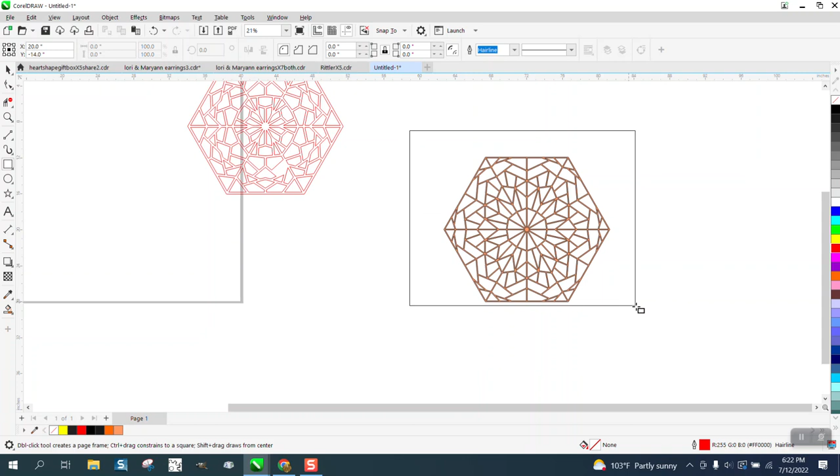Let's imagine making that same size clock, hit P, and put it in the center of the page. That won't matter yet. Go to Object, break the curve apart, get that shape, move it out of the way. Left click, right click.

Now let's make this blue. We're going to have a blue painted board behind it. And we'll take this one and hit P, go up to Object, Order, front of page. That's what the clock's going to look like.

Pretty cool. I don't know if he's going to put numbers, but you've got 12, 1, 2, 3 - it's a perfect shape. When I drew this one, I drew it with just lines. Let's draw another one and use some shapes to put in there.

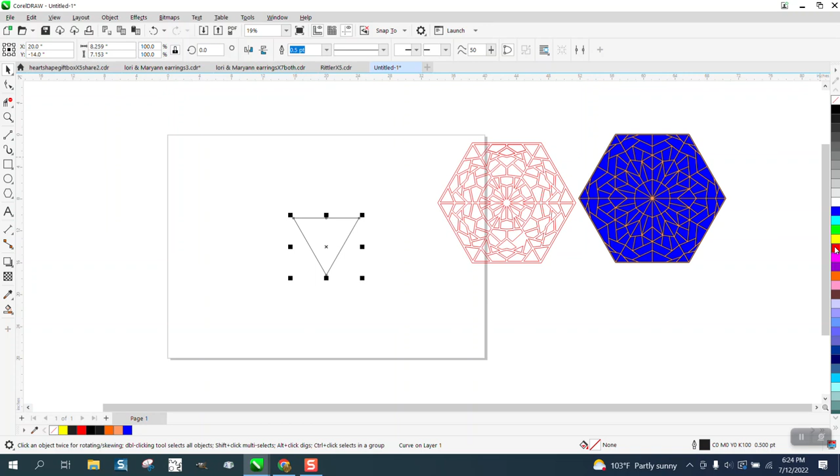Remember in the first video, I rotated it 30 degrees so I have top dead center, because it's a lot easier to go node to node. I'm going to work on this piece right here - take the virtual segment delete tool, nudge, smart fill it, put it over there, hit P, left click, right click. Left click for no fill, right click for fill.

Now let's take another polygon, hit P, hold down the control button, and put it right in the center. Then let's delete this side, everything on this side of it. You could do another polygon.

Let's put a polygon right there. Now, they both need to be equal on this side, so the best way would be Control D to make a duplicate, start moving, and hold down the control button to have it snap to that edge. Because if they're not equal, they won't meet up on the other side. Before going too far, I'd actually look into this.

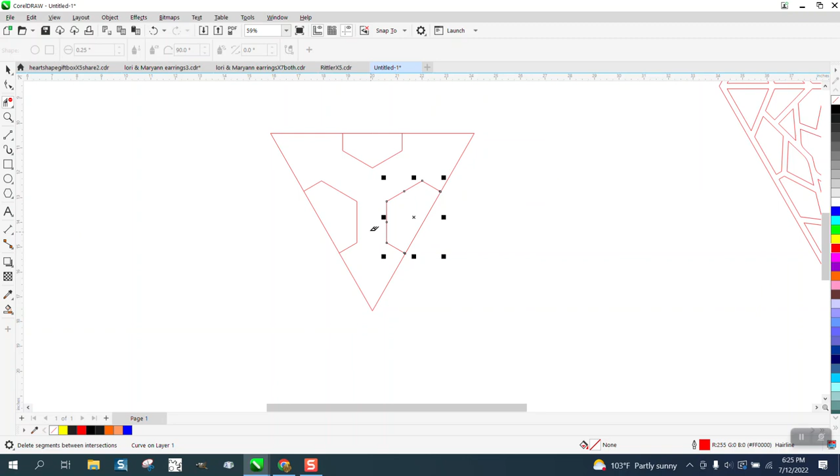Now let's take a circle and see how big our wedge is. Our wedge is - let's make it 8 inches - so we can set our nudge factor to 8. We're going to draw an ellipse and put it right here. Hit the plus key and nudge at 8, and you're dead on, we didn't even have to worry about it.

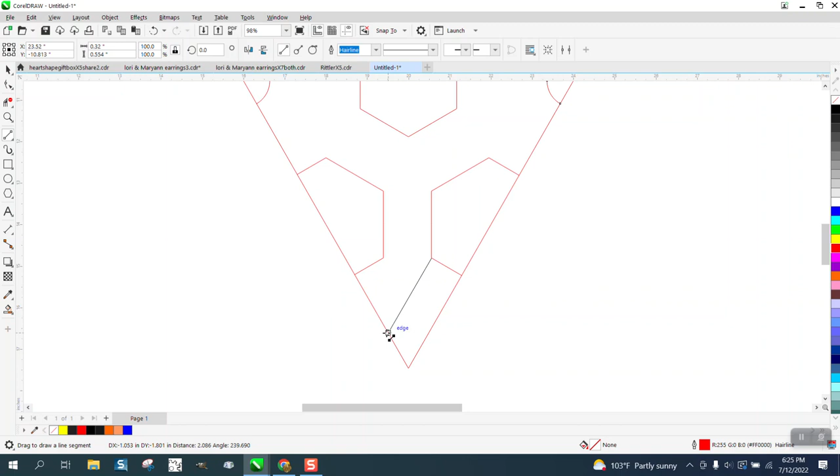From here you could add other shapes - stars, a 2-point line - and I would never go to the middle. You don't have to make them symmetrical. This could go there, that could go there. We're just making shapes, but we started with a polygon. On the other one, I made both sides equal - they don't really have to be.

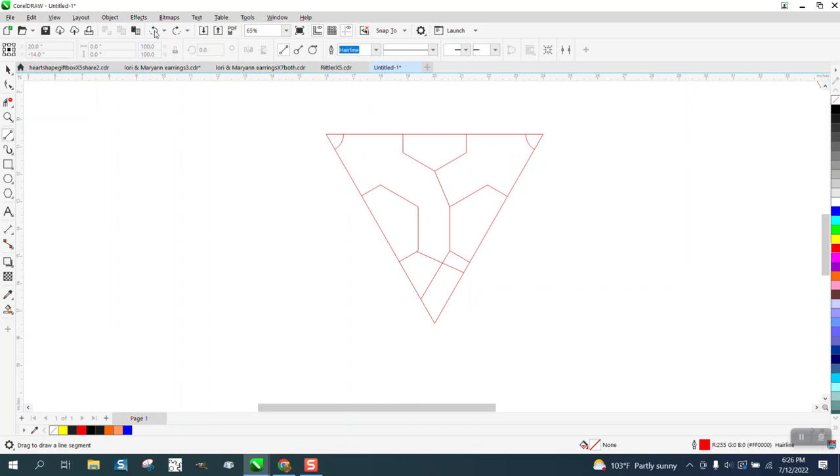Well, they do, don't they? I'm backing up here, I'm messing up. You've got to be equal. That one might work, but when I did it before, I cut it in half and made it equal.

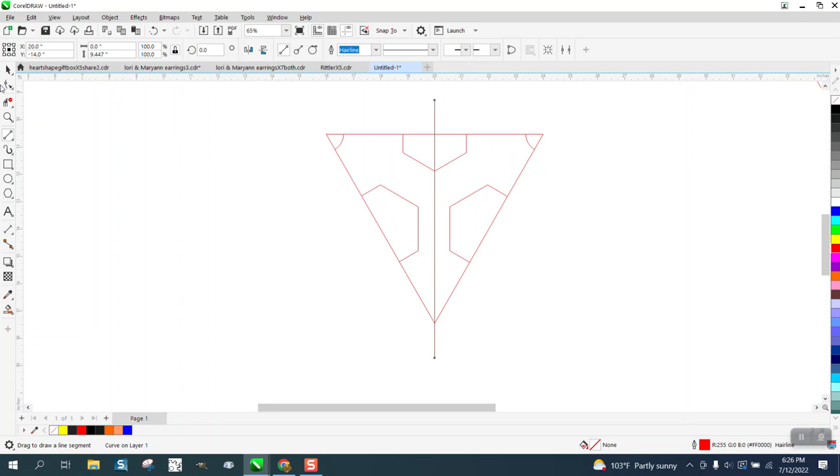So at this point, if you want to do some freehand stuff, hit P, delete everything on this side of the line because we want everything equal. Now we'll take the 2-point line and go from there to there, there to there. Let's go from the middle - that's a little crooked, but it wouldn't really matter.

We could branch off from this one and have it not equal because it's not on that corner. The only ones that need to be equal are the ones on the outside edge.

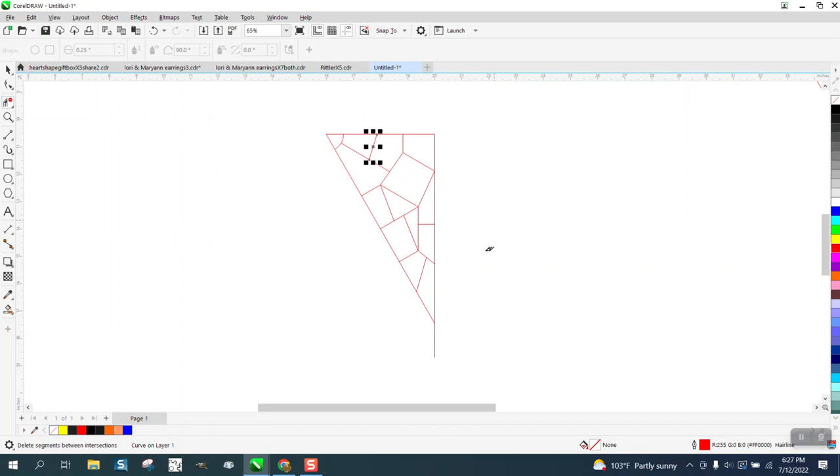Let's take away - remember we started with a polygon on that first shape. We've totally destroyed it, I guess, but Control G to group it, Control D to duplicate it, holding down control, and you get that. So we've got a totally different look.

It looks like a box or polygon, and you could actually cut this line out. Control G to group it, Control D to duplicate it, hit the center rotation - I just double clicked on the center. Let's rotate it 60 degrees. That's going to look pretty good.

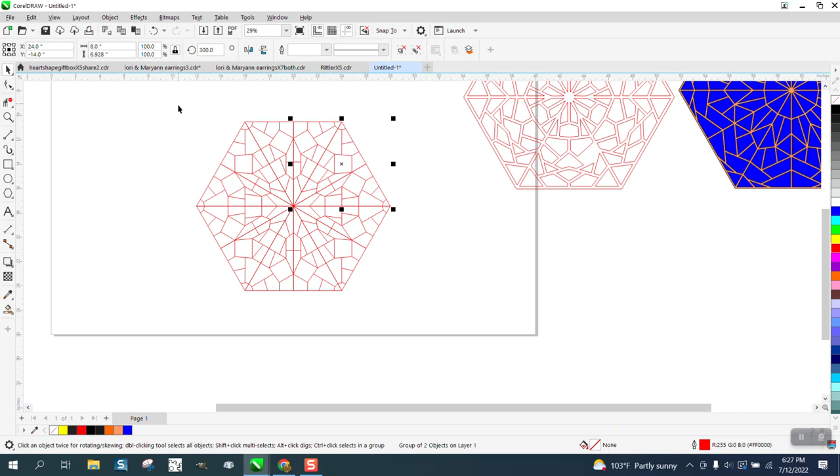A little bit different. Now, like in the previous video, here's the problem - our intersections, when we make our lines thicker, will do that. So we need to ungroup everything, go up to Object, Group, ungroup all, select everything, and make them all 8 points. That's going to look pretty good.

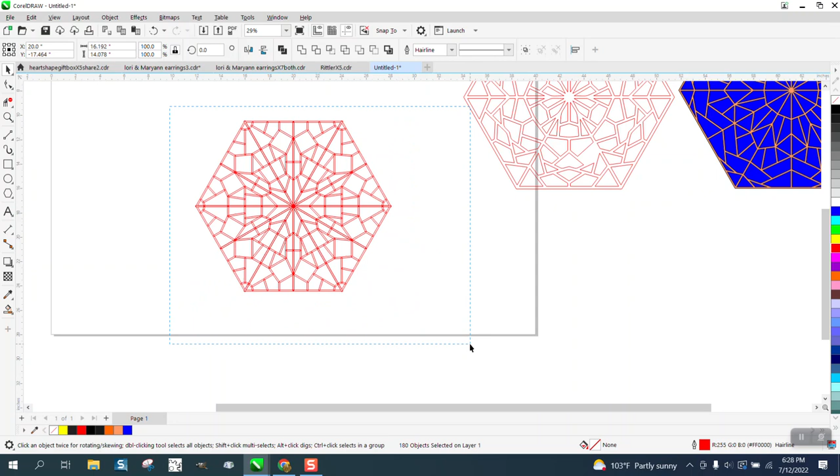Now you need to go to Object, convert the outline to an object so you can weld it. All I did was take the fill away, and I'm going to weld it. Look at that, that's pretty cool - symmetrical, but same thing.

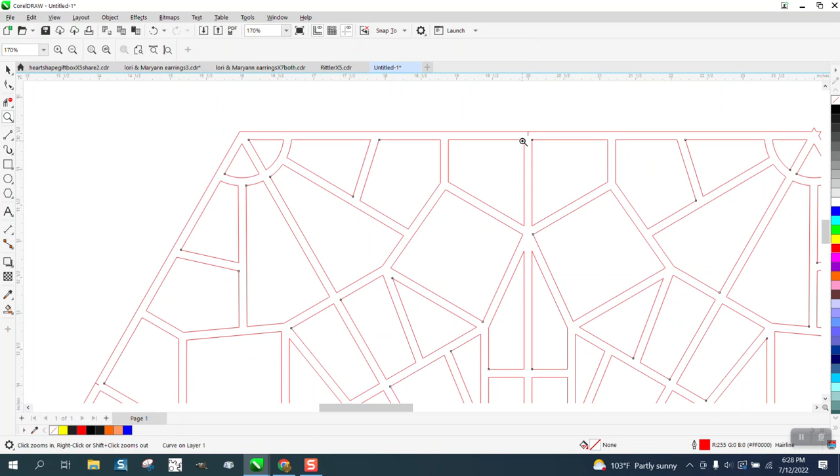If you didn't watch the first video, we've got some lines here we can delete. I'm not going to do it because I deleted all of them. But we do have that center problem again, so you need to look over everything to make sure.

You could actually delete both those. Whoop, somehow I must have just happened to move it. But that's going to look pretty good.

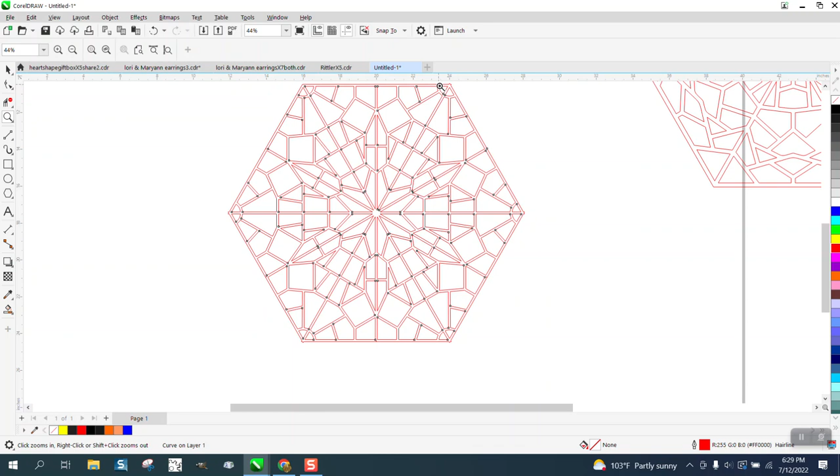I started thinking if we'd put an ellipse here and here, then we'd have an ellipse where the numbers of the clock are going to go. As a matter of fact, if you're making a clock out of this, you could delete that and put your numbers right there, or just leave them blank. There's a lot you can do with this.

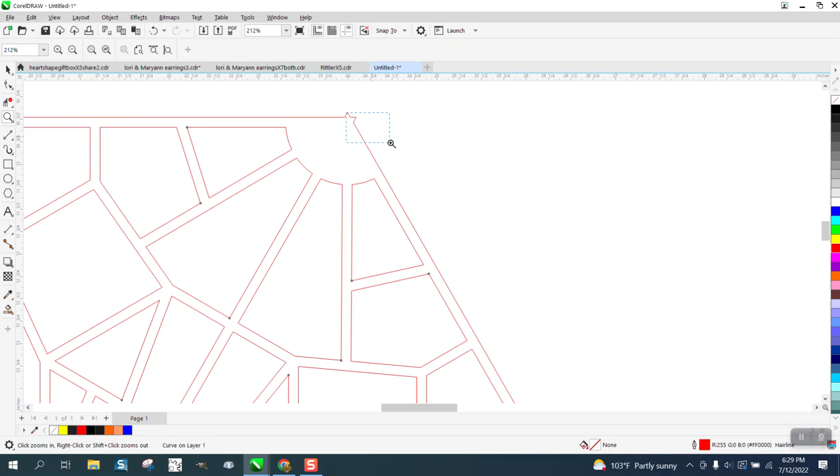My tendency to have everything perfect gets the best of me sometimes.